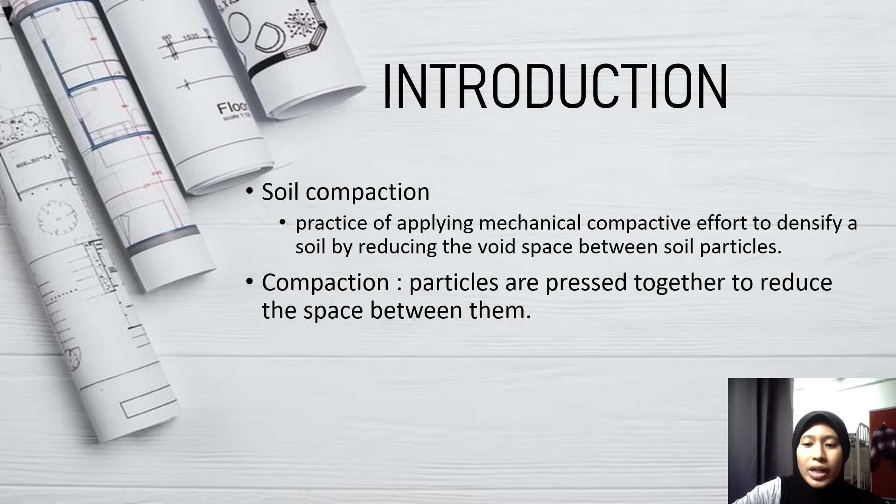Soil compaction is necessary to increase the bearing capacity and stiffness of in situ, or we can call it natural state, or chemically modified soil. Compaction can increase the shear strength of soil by adding friction from the interlocking of particles. Future settlement of soil is reduced by increasing the stiffness and eliminating voids, creating a densified soil.

The removal of voids will reduce the chance of soil settling or shrinking or expanding, and it also helps decrease the water seepage that will lead to deleterious shrinking and swelling soil properties. Shrink or swell properties compromise the pavement structure, thereby leading to premature failure of the pavement structure.

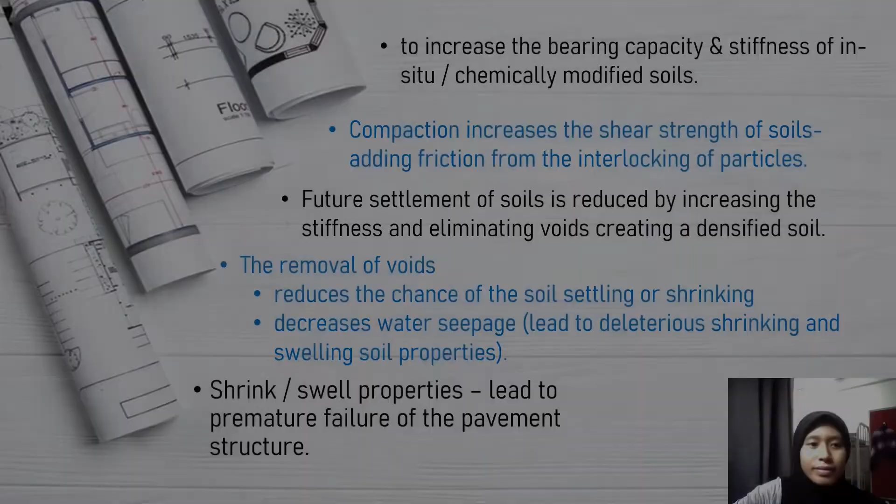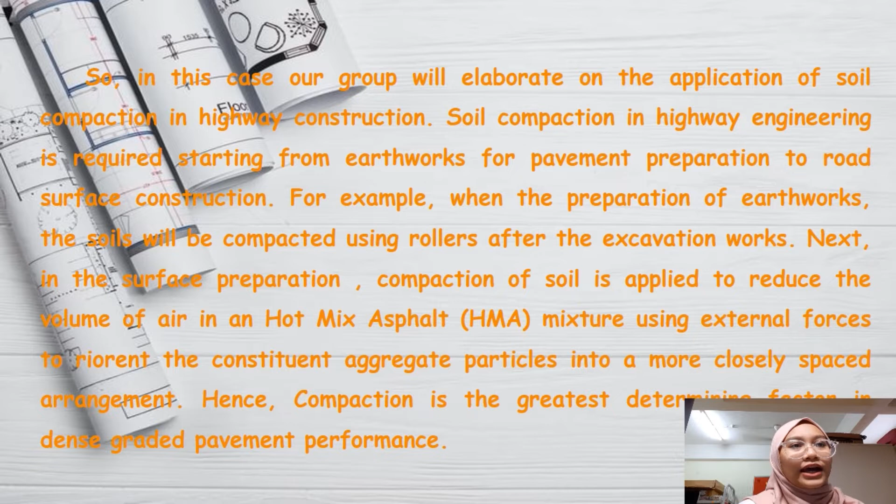So in this case, our group will elaborate on the application of soil compaction in highway construction. As we know, soil compaction in highway engineering is required starting from earthworks for pavement preparation to road surface construction. For example, in the preparation of earthworks, the soils will be compacted using rollers after the excavation works.

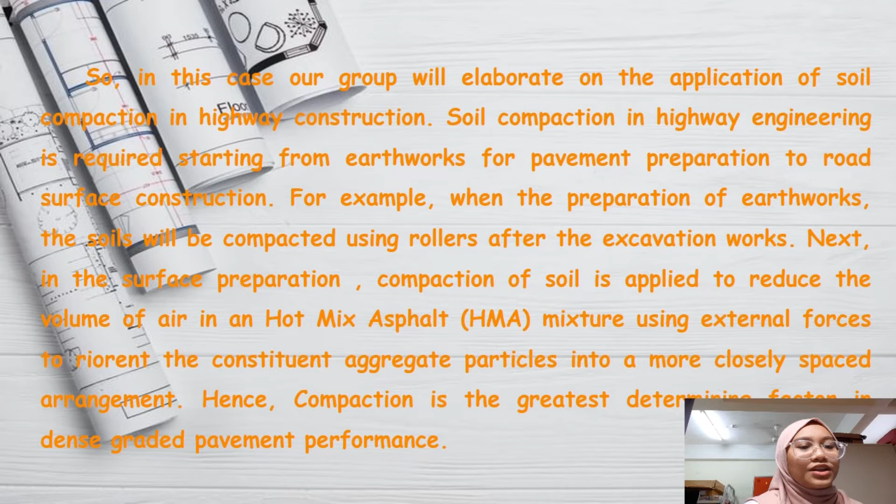Next, in the surface preparation, compaction is applied to reduce the volume of air in hot mix asphalt (HMA) mixture using external forces to reorient the constituent aggregate particles into a more closely spaced arrangement. Hence, compaction is the greatest determining factor in dense graded pavement performance.

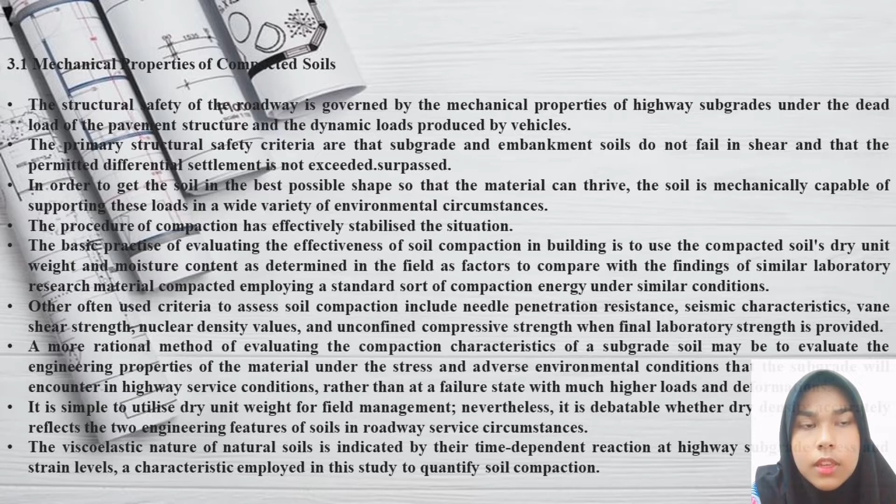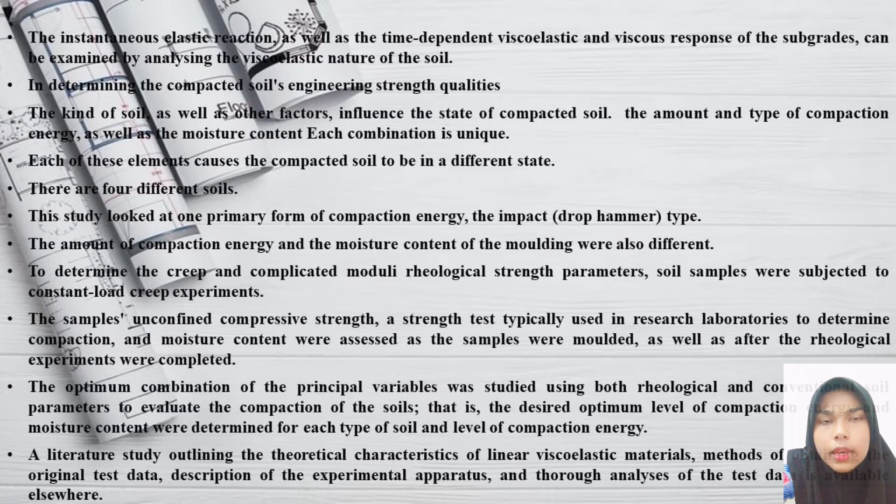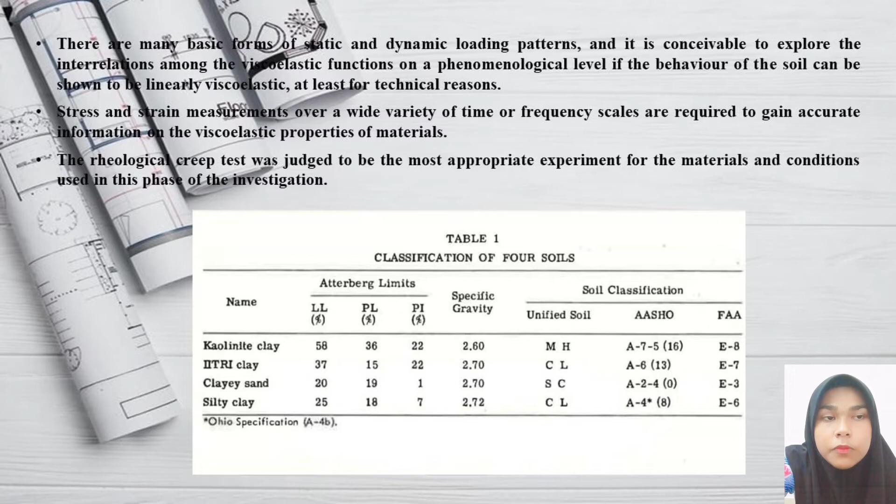The instantaneous elastic reaction as well as the time-dependent viscoelastic and viscous response of the subgrades can be examined by analyzing the viscoelastic nature of the soil. There are many basic forms of static and dynamic loading patterns, and it is conceivable to explore the interrelations among the viscoelastic functions on a phenomenological level of the behavior of the soil.

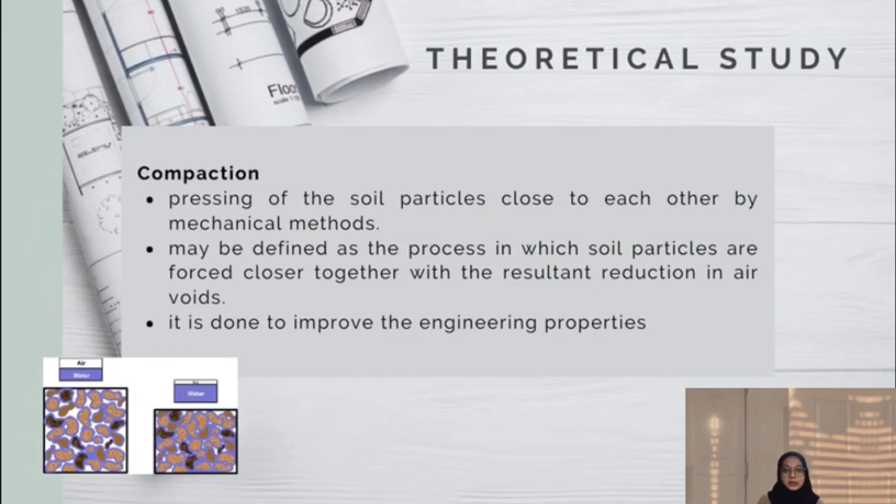It is done to improve the engineering properties like strength and stability, and reduce compressibility and permeability of the soil. As you can see in the figure, there is a soil compaction effect on the soil. In the construction of highways and other engineering structures, loose soil must be compacted to increase the dry unit weights. To compact a soil, that is to place it in a dense state.

The dense state is achieved through the reduction of the air voids in the soil with little or no reduction in the water content. This process must not be confused with consolidation, which is different from compaction. Consolidation means water is squeezed out under the action of continuous static loads.

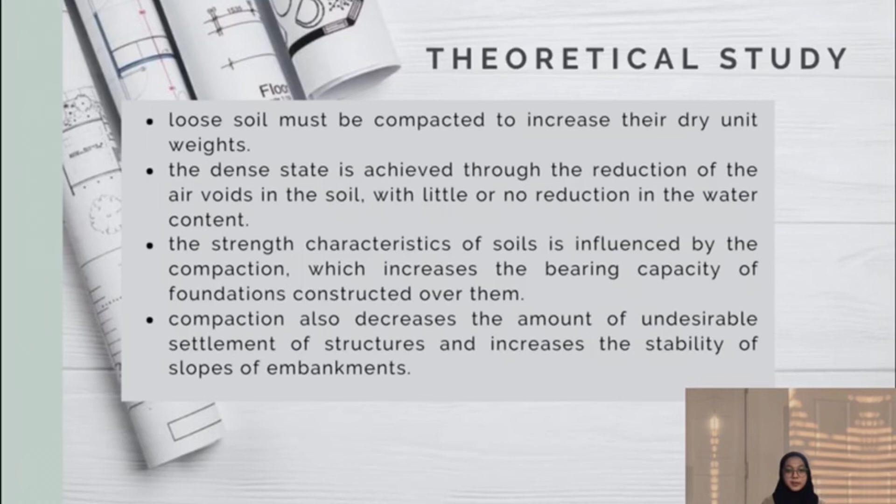Hence, the strength characteristics of soils are influenced by compaction, which increases the bearing capacity of foundations constructed over them. Compaction also decreases the amount of undesirable settlement of structures and increases the stability of slopes of embankments. Compaction is the process by which the bulk density of an aggregate of matter is increased by driving out air.

For any soil, for a given amount of compactive effort, the density obtained depends on the moisture content. At very high moisture content, the maximum dry density can be obtained when the soil is compacted to nearly saturation, where almost all the air is driven out.

At low moisture contents, the soil particles interfere with each other, and addition of some moisture will allow greater bulk densities, with a peak density where this effect begins to be counteracted by the saturation of the soil. Soil compaction is necessary to increase the bearing capacity and stiffness of a natural state or chemically modified soil. Compaction increases the shear strength of soil by adding friction from interlocking of particles.